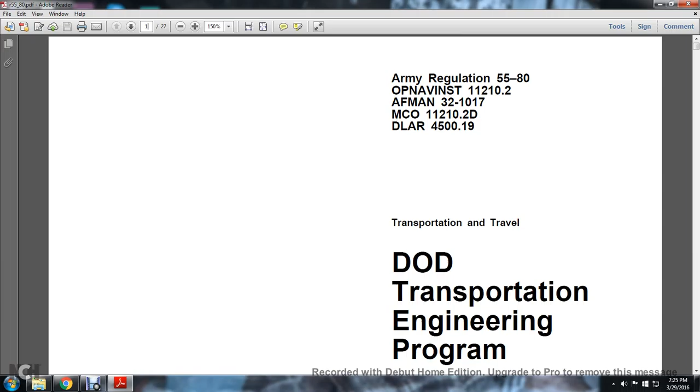Chapter 3, Department of Defense Transportation Engineering Program. Transportation and Travel Department of Defense Transportation Engineering Program.

Chapter 3, Highways for National Defense Program. The chapter provides the policy and procedure integrated with Department of Defense public highway needs for federal, state, and local transportation programs, normally conditioned with emergency situation procedures, services related to the Defense Highway System Program, the Defense Access Roads Program, the Department of Defense Traffic Engineering Program, and military use of public highways. There's also a collective constitution of the Highways for National Defense Program, the HND Program.

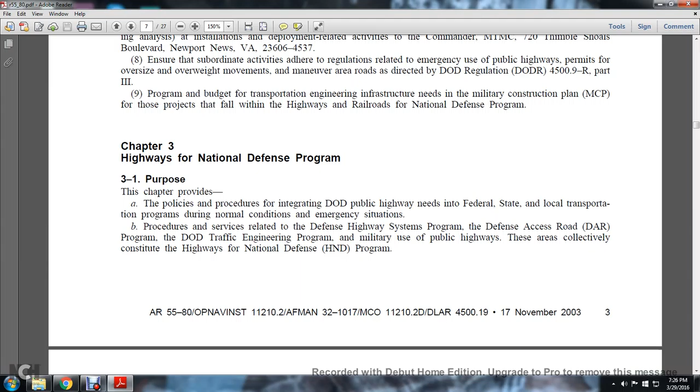3.2 Program applicability: this chapter applies to public highways open to general public travel in the United States, including non-restrictive roads for military installations.

Under these policies, installation activity commanders would identify peacetime and contingency off-installation public highway needs so that state and local highway authorities, as appropriate, can plan and budget projects and programs. State and local government authorities are expected to develop and maintain public highways accommodating normal continuing traffic generated by defense installation activities, the same as for other non-DOD traffic generated.

Military installation activities will not provide funds to maintain other off-installation public highways except for extraordinary circumstances as approved by the commander of the Military Traffic Management Command.

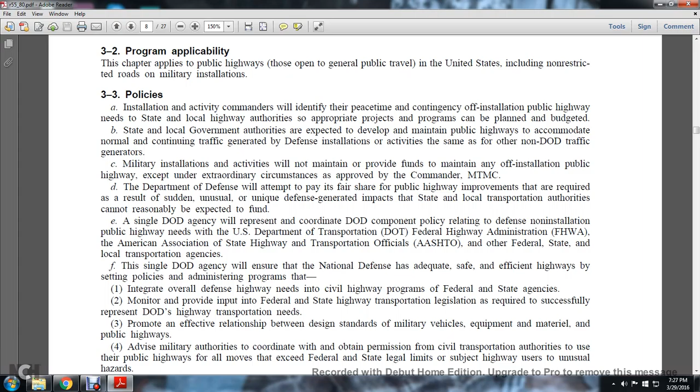The Department of Defense will attempt to pay its fair share of public highway improvements required as a result of sudden, unusual, unique defense-generated impacts that state and local transportation authorities cannot reasonably fund. A single Department of Defense agency will represent and coordinate with Department of Defense components the policy relating to defense non-installation public highway needs of the U.S.

Department of Transportation, Federal Highway Administration, the American Association of State Highway and Transportation Officials, and other federal, state, and local transportation agencies. The single Department of Defense agency ensures national defense has adequate, safe, and efficient highways by setting policy and administrative programs, integrating overall defense highway needs with the civil highway programs of federal, state, and local agencies, and monitoring and providing input into federal and state highway transportation legislation as required to successfully represent Department of Defense highway transportation needs, promoting an effective relationship between the design standards of military vehicle equipment and materiel and public highways.

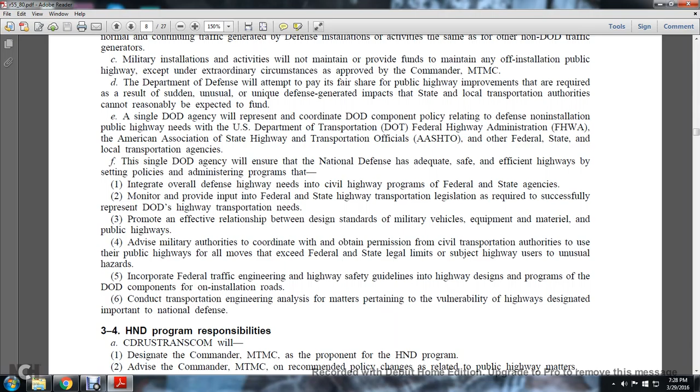It conducts transportation engineering analysis related to the vulnerability of highways designated as important to national defense. CDRUSTRANSCOM, designated along with the Commander, Military Traffic Management Command, as proponent of the Highway National Defense Program, advises the commander of Military Traffic Management Command, recommending policies related to public highway matters. The commander of Military Traffic Management Command will act as the Department of Defense focal point integrating defense public highway needs with civilian highway programs.

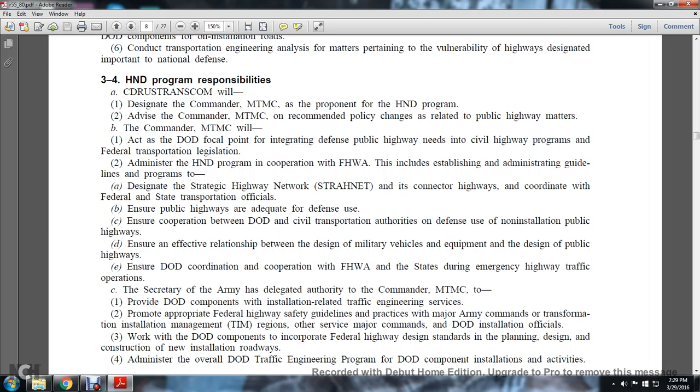Federal transportation legislation is administered through the Highway National Defense Program in cooperation with the Federal Highway Administration, including establishing and administering guidelines for the program designated for the Strategic Highway Network and connecting highways, coordinating with federal and state transportation offices to ensure public highways are adequate for defense, ensuring cooperation between the Department of Defense and civil transportation authorities on defense use of non-installation public highways, ensuring an effective relationship between the design of military vehicles, equipment, and public highways, and use of DOD coordination and cooperation with the Federal Highway Administration and the states during emergency highway traffic operations. The Secretary of the Army delegated authority to the commander of the Military Traffic Management Command.

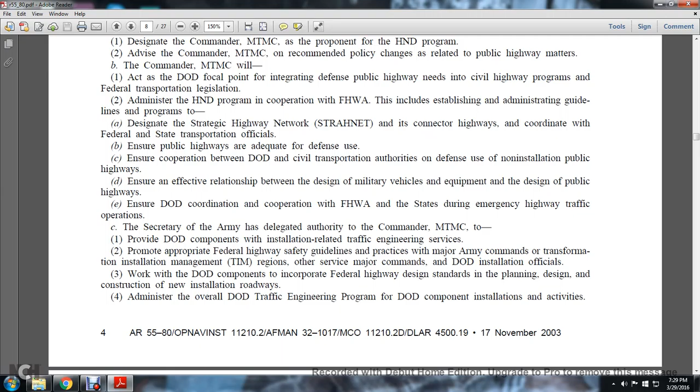This includes providing DOD components with installation-related traffic engineering services promptly and in accordance with federal and state highway guidelines and practices, for the Major Army Command, Transformation Installation Management Regions, other service major commands, and Department of Defense installation officials, working with Department of Defense components to incorporate Federal Highway Design standards in planning and design and construction of new installation roadways, administering the Department of Defense Traffic Engineering Program across Department of Defense components and installation activities.

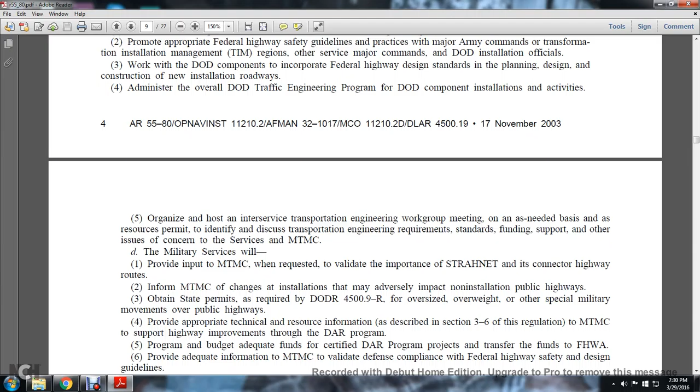Fifth, organize and host inter-service transportation engineering work group meetings on an as-needed basis, to identify and discuss transportation engineering requirements, standards, funding support, and other issues of concern to the Services and Military Traffic Management Command. Military services coordinate with the Military Traffic Management Command to validate the importance of STRAHNET connector highway routes, and inform the Military Traffic Management Command of changes at installations that adversely impact non-installation public highways.

Obtaining state permits is required by Department of Defense Regulation 4500.9R for oversized, overweight, and other special military movements on public highways, provided appropriate technical resource information is described in Section 3-6 of the regulation on Military Traffic Management Command highway improvements.

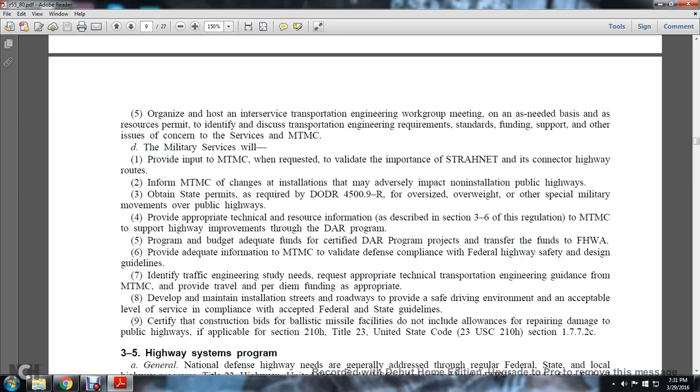For the DAR program, the program budget must be adequate for certified DAR program projects transferred to the Federal Highway Administration, and adequate information must be provided to Military Traffic Management Command to validate compliance with Federal Highway safety and design guidelines, and to define traffic and engineering study needs.

This includes appropriate technical transportation engineering guidance from Military Traffic Management Command, provided travel and per diem funding and permits as appropriate, to develop and maintain installation streets and roadways providing safe, environmentally acceptable levels of service in compliance with federal, state, and guidelines, certified with construction bids. Ballistic missile facilities do not include allowances to repair damage to public highways if applicable under Section 210H of Title 23, United States Code.

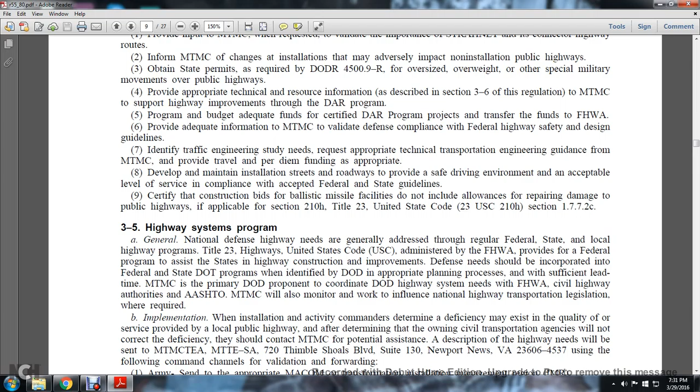3.5 Highway System Programs. Generally, National Defense Highway needs should address the regular federal, state, and local highway programs. Title 23 of the United States Code, administered with the Federal Highway Administration, provides federal programs to assist states with highway construction and improvements.

Defense needs should be incorporated into these federal, state, and DOT programs where identified with the Department of Defense and the appropriate planning process, with Military Traffic Management Command as the primary Department of Defense component to coordinate Department of Defense highway system needs.

The Federal Highway Administration, civil highway authorities and AASHTO. MTMC will monitor and influence national highway transportation legislation implementation. When installation commanders determine a deficiency may exist in the quality of service provided by local public or civil transportation agencies and determine it will not be corrected, they should contact the Military Traffic Management Command for potential assistance.

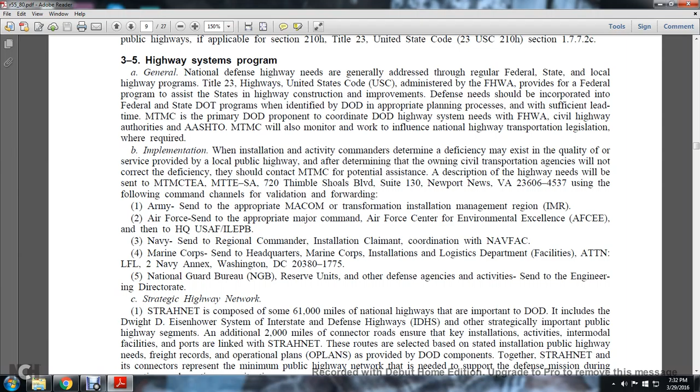Descriptions of highway needs should be sent to the Military Traffic Management Command, MTTE-SA, 720 Thimble Shoals Boulevard, Suite 130, Newport News, Virginia, VA 23606-4537, using the following command channels for validation and forwarding.

Army: sent to the appropriate MACOM, the Transformation Installation Management Region, IMR.

Air Force: sent to the appropriate major command, the Air Force Center for Environmental Excellence, and then to the headquarters of the U.S. Air Force. Navy: sent to the Regional Commander, Installation Coordination, the Navy Facilities Engineering Command, and to the headquarters Marine Corps Installation Logistics Department.

For National Guard Bureau, Reserve units, and other defense agency activities, send to the Engineering Directorate.

Strategic Highway Network. The Strategic Highway Network, or STRAHNET, is composed of 61,000 miles of national highways important to the Department of Defense. It includes the Dwight D. Eisenhower System of Interstate and Defense Highways.

Other strategically important public highway segments add an additional 2,000 miles of connector roads to ensure key installation activities and intermodal facilities are linked to the Strategic Highway Network.

Routes are selected based on installation public highway needs, freight records, and operational plans provided by the Department of Defense. Together, the Strategic Highway Network and connectors represent the minimum public highway network needed to support the defense mission in peacetime and contingency situations.

Continued validation of the Strategic Highway Network is important to the Department of Defense because it is formally identified as part of the National Highway System.

The National Highway System is designated by Congress to provide one of the major funding categories for allocation of federal aid highway funds to the states for the use of public highway designation, all to assist states in meeting Department of Defense public highway needs.

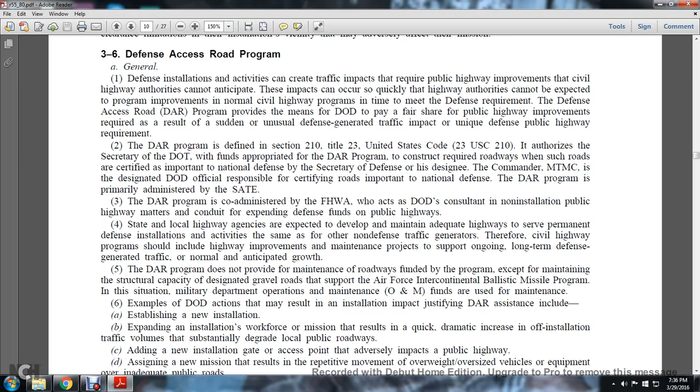The Access Road Program is primarily administered by SATE. The Defense Access Road Program is co-administered with the Federal Highway Administration, which acts as a DOD consultant in non-installation public highway matters, and conduit for expending defense funds on public highways.

State and local highway agencies are expected to develop and maintain adequate highways to serve permanent defense installation activities the same as non-defense traffic generated. Therefore, civilian highways should have improvements and projects that support long-term defense-generated traffic and normal anticipated growth. The DAR program does not provide for maintenance of roadways funded under the program.

An exception is made for maintaining the structural capacity of designated gravel roads supporting the Air Force Intercontinental Ballistic Missile Program. In such situations, military department Operation and Maintenance (O&M) funds are used for the maintenance.

Examples of Department of Defense actions that may result in an installation impact justifying a defense access road include establishing a new installation and expanding an installation's workforce or mission. This can result in a quick, dramatic increase in off-installation traffic volumes that substantially degrade local public roads, adding new installation gates or access points that adversely impact public highways, assigning a new mission resulting in repetitive movement of overweight and oversized vehicles and equipment, or inadequate public roads within the boundaries of an installation such that existing non-installation public highways may be closed.

Installation officials should ensure that off-installation highway impacts are considered when planning installation development, since Department of Defense resources can be required and significant impacts on other installations can result from program budgeting.

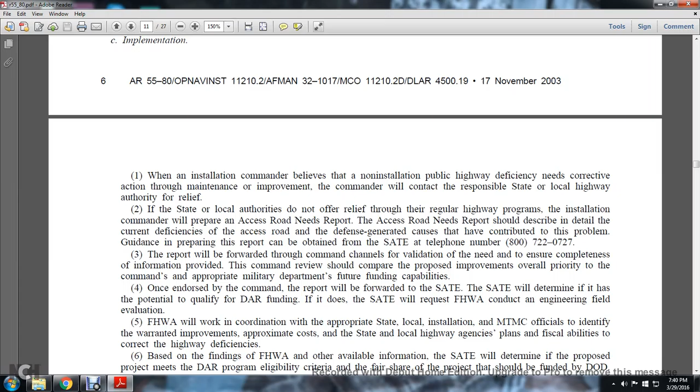The telephone number is 800-722-0727. The report is forwarded through command channels for validation, to ensure the accuracy of the information provided. The reviewing commander should compare the proposed improvements against overall priorities and the appropriate military department's funding capabilities.

Once endorsed by the command, the report will be forwarded to the SATE. The SATE will determine if it has potential to qualify for Department of Defense access road funding, and if it does, the SATE will request the Federal Highway Administration to conduct an engineering field evaluation.

The Federal Highway Administration will coordinate with the appropriate state and local officials, and military traffic management command officials, to identify warranted improvements, estimate the cost, and assess state and local highway agencies' ability to correct the highway deficiencies.

Based on the findings of the Federal Highway Administration and other available information, the SATE will determine whether the proposed project meets the Department of Defense Access Road Program eligibility criteria, and the fair share of the project that should be funded by the Department of Defense.

Once the final project scope and the amount of defense funding contribution are agreed upon by the appropriate civil authorities and the SATE, the command or the Military Traffic Management Command, in accordance with Title 23 U.S. Code 210, will certify that the road section is important for national defense.

This certification is a requirement before any Department of Defense funds are provided to public highway authorities. The Department of Defense may not provide funds to public highway authorities for non-installation highway improvements through any other means except by direction of Congress.

Department of Defense access road funds are normally identified as a specific line item in the annual military construction programs of the appropriate military department, in accordance with the military department's procedures for programming, budgeting, and financing.

Defense Access Road projects for their respective installation activities, appropriated through the Defense Access Road Program, will have their funds transferred to the Federal Highway Administration at the direction of the MTMC.

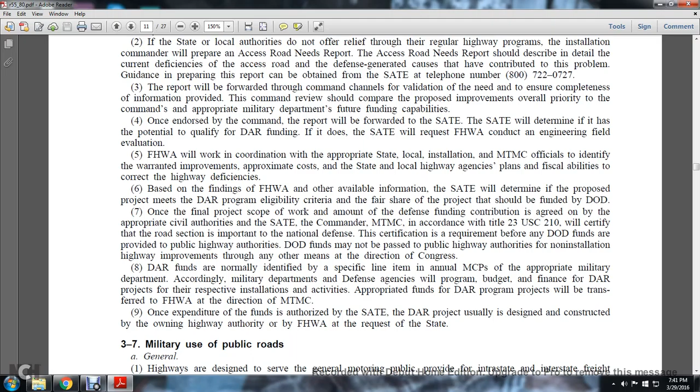Once the expenditure of funds is authorized by the SATE, the DAR project is usually designed and constructed by the owning highway authority or by the Federal Highway Administration, at the request of the state.

3.7 Military Use of Public Roads. General highways are designed as a general motoring public system providing interstate and intrastate freight movement that meets the needs of the Department of Defense in peacetime, operating within federal and state highway legal limits and safety regulations, to help ensure the highway's adequate availability if required for a national emergency.

Therefore, Department of Defense policy requires that movement of extremely oversized or overweight vehicles and cargo use alternate modes such as rail, barge, or other commercial highway carriers whenever possible.

If no feasible alternative exists, the Department of Defense must obtain permits from the owning highway authority. The authority for movement of oversized, overweight equipment on public roads is required just as it is for non-Department of Defense highway users.

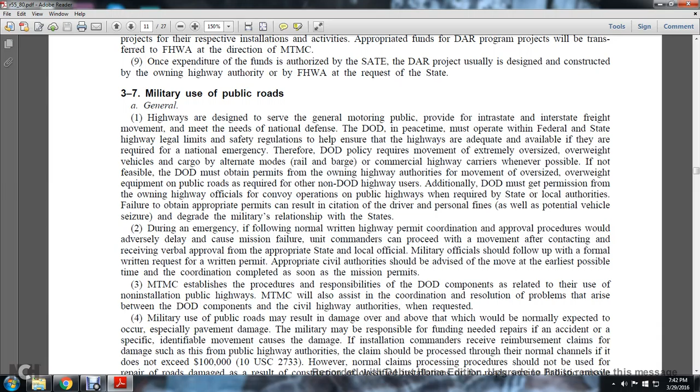Additionally, Department of Defense units must get permission from the owning highway officials for convoy operations on public highways when required. Failure to obtain appropriate permits from state and local authorities can result in citation of the driver, personal fines, potential vehicle seizure, and can degrade military relationships within the states.

During an emergency, following the normal written highway permit coordination and approval procedures may adversely delay the mission, causing mission failure. Unit commanders can proceed with a movement after contacting and receiving verbal approval from the appropriate state, local, and military officials, and should follow up with a formal written request for a written permit. The appropriate civil authorities should be advised of the move at the earliest possible time, with coordination completed as soon as the mission permits.

The Military Traffic Management Command establishes procedures and responsibility for Department of Defense components as related to the use of non-installation public highways.

The Military Traffic Management Command will also assist in coordinating resolution of problems that arise between the Department of Defense and civil highway authorities when requested. Military use of public roads may result in damage beyond what would normally be expected, especially pavement damage.

The military may be responsible for funding repairs for damage caused by an accident or a specific and identifiable movement. If an installation commander receives a reimbursement claim for such damage from public highway authorities, the claim should be processed through normal channels if it does not exceed $100,000.

However, normal claims processing procedures should not be used for repair of road damage resulting from construction of classified installations, or roads serving ballistic missile facilities, or for claims exceeding $100,000. These should be referred to the Military Traffic Management Command for resolution.

Oversized, overweight movement and convoys. Defense Transportation Regulations, Department of Defense 4500.9R, Part 3, Appendix 5, permits oversized, overweight, and other special military movement on public highways in the United States and provides specific guidance. Requests for special hauling permits require the Department of Defense representative authorized to determine whether highway movements are essential to the national defense, both commercial and organic transportation movements.

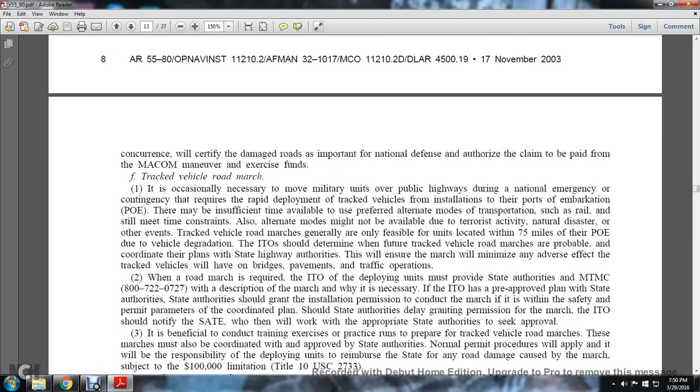Track vehicle road march: it is occasionally necessary to move military units on public highways during a national emergency or contingency that requires rapid deployment of track vehicles from the installation to the port of embarkation. There may be insufficient time available to use preferred alternative modes of transportation such as rail to meet the constraints, and alternative modes might not be available due to terrorist attack, natural disaster, or other events.

Track vehicle road marches are generally only feasible for units located within 75 miles of the port of embarkation. Due to vehicle degradation, the ITOs should determine when future tracked vehicle road marches are probable and coordinate their plans with the state highway authorities.

This will ensure that the march minimizes any adverse effects that tracked vehicles will have on bridges, pavements, and traffic operations.

When a road march is required, the ITO of the deploying units must provide the state authorities and the Military Traffic Management Command at 800-722-0727, along with the description of the march and why it is necessary.

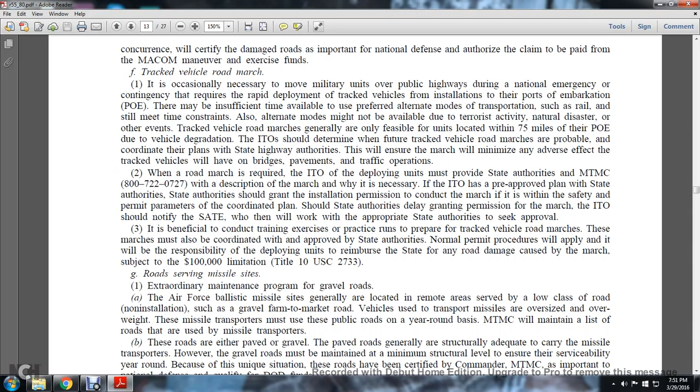If the ITO has a pre-approved plan with the state authorities, it should grant the installation permission to conduct the march, provided it is within the parameters of the coordinated plan and safety permits. Should the state authorities delay granting permission for the march, the ITO should notify SATE, who will then work with the appropriate state authorities to seek approval.

It is beneficial to conduct training exercises as practice runs to prepare for track vehicle road marches. These marches must also be coordinated with the appropriate state authorities.

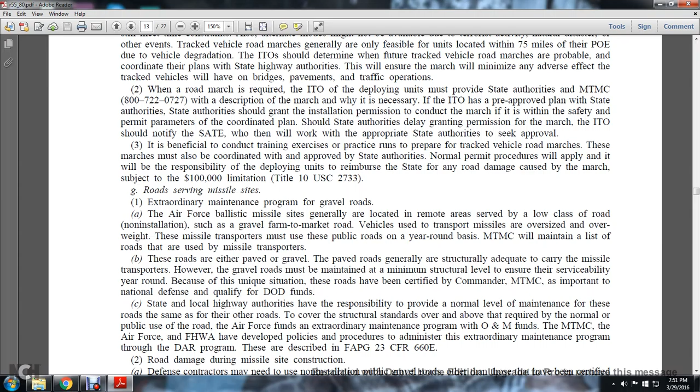Normal permit procedures will apply, and the deploying units will be responsible for reimbursing the state for any road damage caused by the march, subject to a $100,000 limitation under Title 10 U.S. Code 2733.

Roads serving missile sites: extraordinary maintenance program for gravel roads. Air Force ballistic missile sites generally are located in remote areas served by a low class of non-installation roads, such as gravel farm-to-market roads.

Vehicles used to transport missiles are oversized, and the missile transporters must use the public roads on a year-round basis. The Military Traffic Management Command will maintain a list of the roads used for missile transporters. These roads are either paved or gravel.

Paved roads generally are structurally adequate to carry the missile transporters. However, the gravel roads must be maintained at a minimum structural level to ensure serviceability year-round.

Because of this unique situation, the roads have been certified by the Commander of the Military Traffic Management Command as important for national defense, qualifying for DOD funds.

State and local highway authorities have the responsibility to provide a normal level of maintenance for these roads, the same as for their other roads, to cover the structural standards above that required for normal public use of the roads. The Air Force funds the extraordinary maintenance program.

with O & M funds. The Military Traffic Management Command, the Air Force, and the Federal Highway Administration has developed policy and procedures to administer the extraordinary maintenance program through the Department of Defense Access Road Program, as described in the FAPG 23 CFR 660E.

Road damage during missile site construction: defense contractors may need to use non-installation public gravel roads, other than those certified as important for national defense, during construction of missile facilities, because some of these roads were not designed to support the type of traffic from construction vehicles and may be damaged.

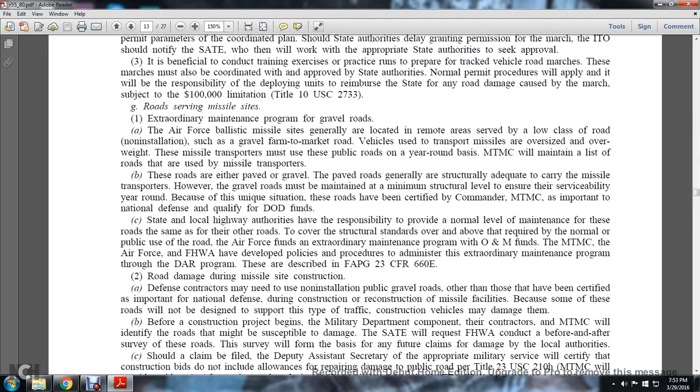Before the construction project begins, the military department component, their contractors, and the Military Traffic Management Command identifies the roads that might be susceptible to damage. The SATE will request the Federal Highway Administration conduct before and after surveys of these roads. These surveys will form the basis of any future claims of damage by local authorities.

Should the claim be filed, the Deputy Assistant Secretary of the appropriate military service will certify that construction bids do not include allowances for repairing damage to public roads, per Title 23 U.S. Code 210H. Military Traffic Management Command will provide guidance after review and analysis of relevant information. The SATE will determine the recommendation on certification for the Military Traffic Management Command.

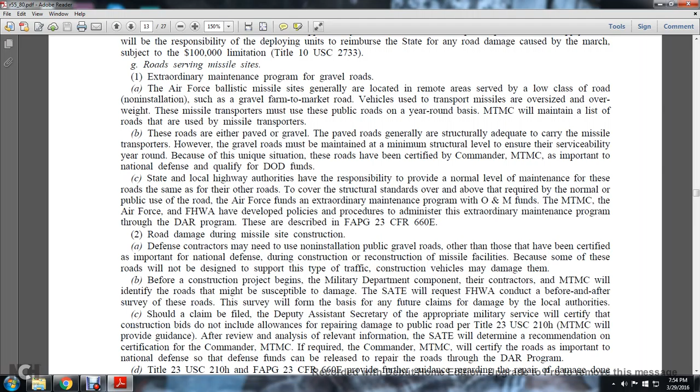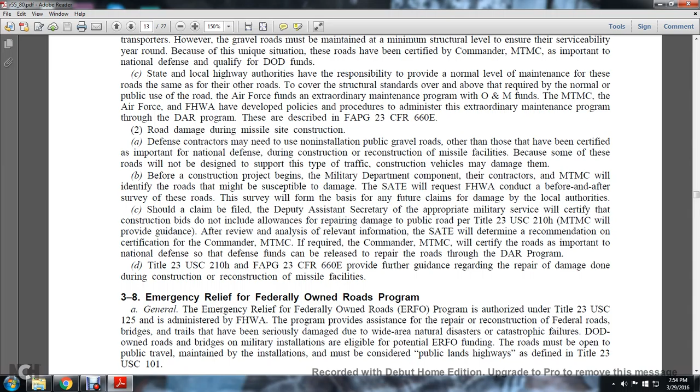If required, the Military Traffic Management Command will certify the roads as important to national defense so that defense funds can be released for repair of the roads through the DAR Program. Title 23 U.S. Code 210h and FAPG, 23 CFR 660E, provides further guidance regarding repair of damage done during construction or reconstruction of missile facilities.

Section 3.8, Emergency Relief for Federally Owned Road Programs. The Emergency Relief for Federally Owned Roads program is authorized under Title 23 U.S. Code 125 and administered by the Federal Highway Administration. The program provides assistance for repair or reconstruction of federal roads, bridges, and trails that have been seriously damaged due to wide-area natural disasters or catastrophic failures, and Department of Defense-owned roads, bridges, and on military installations that are eligible for potential ERFO funding.

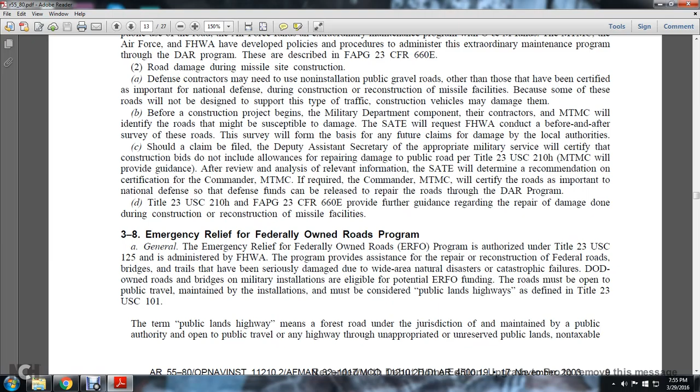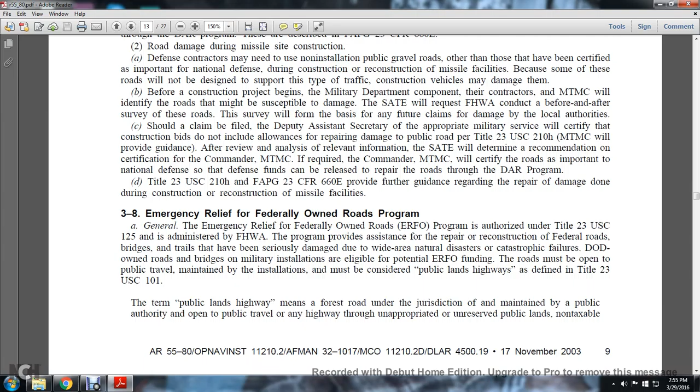Funding of roads open to public travel and maintained by the installation must be considered public land highways, as defined in Title 23 U.S. Code 101. The term public land highways means forest roads under the jurisdiction of, and maintained by, public authority, open to public traffic, and any highway through unappropriated, unreserved public lands, non-taxable Indian lands, or other federal reservations under the jurisdiction of and maintained by public authority and open to public travel.

Implementation: an installation official who believes road damage has occurred due to a natural disaster or catastrophic failure may contact the Military Traffic Management Command and begin the process of determining eligibility. This should be done within two weeks following the disaster or failure.

The installation will need to provide the date and time, description of the event, and description of the damage to the road. Based on this information, the SATE will prepare the initial Department of Defense notification to the Federal Highway Administration.

Installation officials should immediately document the roadway damage with photographs and detailed descriptions, and cost estimates, and should begin emergency repairs to restore essential traffic service and prevent further damage to the federally owned facilities.

If properly documented, the costs may later be reimbursed. The Federal Lands Highway Division engineer, the FLHD, makes a formal finding on whether the disaster qualifies for funding under the ERFO program.

Installation officials and the Federal Lands Highway Division engineer will prepare a disaster assessment and field report. The Federal Lands Highway Division engineer will make the finding on whether the documented natural disaster or catastrophic failure has occurred and establish eligibility for ERFO funding.

If the finding is positive and funding eligibility is issued, a detailed on-site inspection will be conducted with the support of the installation official.

The installation will submit an application to the Military Traffic Management Command for transmittal to the Federal Lands Highway Division engineer. The Federal Lands Highway Division engineer will approve the appropriate project for the Federal Lands Highway Division. The administrator will allocate obligation authority to the SATE.

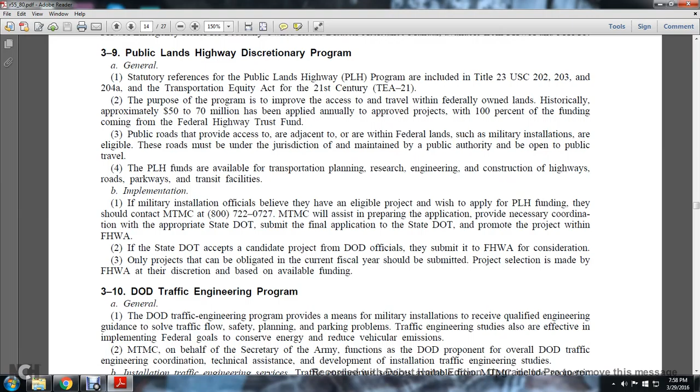If the state Department of Transportation accepts the candidate project from the Department of Defense, they submit it to the Federal Highway Administration, and for consideration only projects that can be obligated within the current fiscal year should be submitted.

3-10: Department of Defense Traffic Engineering Program.

The Department of Defense Traffic Engineering Program provides a means for military installations to receive qualified engineering guidance to solve traffic flow, safety planning, and parking problems. The traffic engineering studies are also effective in implementing federal goals to conserve energy and reduce vehicle emissions.

Installation traffic engineering services available from the Military Traffic Management Command include geometric design of transportation facilities, analysis of traffic operation safety concerns, analysis of roadway facilities, and analysis and assignment of specific gate entry control facilities to support installation anti-terrorism project selection.

Placement and operation of traffic control devices, guidance in support of installation master comprehensive planning, and regional shore installation planning.

Each study involves a review of the installation master development and comprehensive plan, collection of data, review of accident and congestion problems, location analysis, roadway enhancement alternatives, and development of recommended engineering improvements.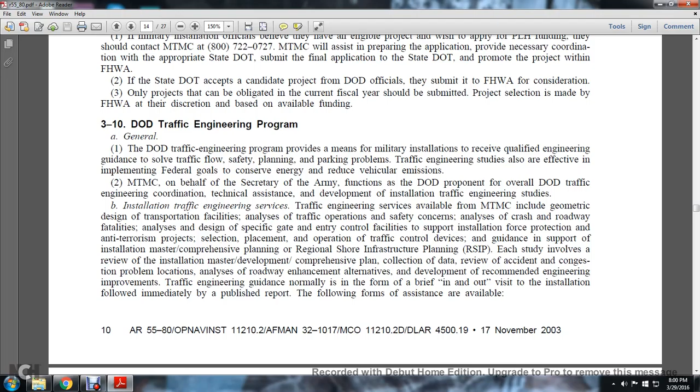Telephone advice: assistance from Military Traffic Management Command transportation engineers is available at 800-722-0727 to help resolve problems.

Limited in scope, they answer specific questions related to the proper application of traffic control devices, design criteria, and similar topics, and review plans, concepts, and proposals.

These services are available to validate the preliminary design for new transportation traffic-generating facilities prior to the actual site selection or design approval.

Reconnaissance studies address problems limited in scope, usually accomplished by an engineer being on site for 2 to 4 days.

Intermediate study: the intermediate study addresses several problems of limited to average scope, usually accomplished by an engineer being on site for 4 to 7 days.

Comprehensive study: this normally analyzes the entire installation transportation network and addresses numerous operational and planning issues. Because of the time and resources required to conduct them, they are usually outsourced to contract firms at installation expense.

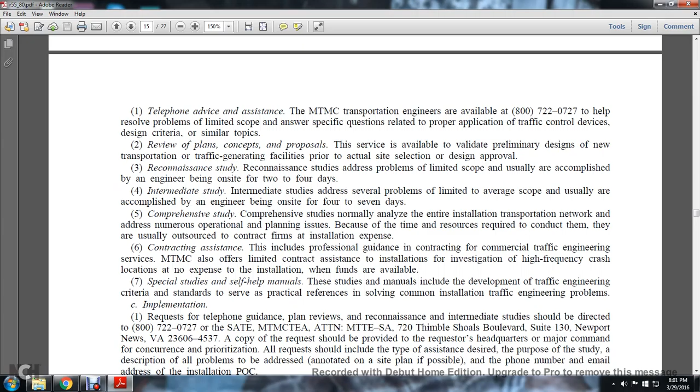Contracting assistance includes professional guidance for contracting commercial traffic engineering services. The Military Traffic Management Command also offers limited contract assistance to installations for the investigation of high-frequency crash locations, at no expense to the installation when funds are available.

Special studies and self-help manuals: these studies and manuals include the development of traffic engineering criteria and standards that serve as a practical reference in solving common installation traffic engineering problems and implementations.

Requests for telephone guidance, plan reviews, or reconnaissance and intermediate studies should be directed to 800-722-0727 or SATE, MTMCTEA, 720 Thimble Shoals Boulevard, Suite 130, Newport News, Virginia 23606-4537.

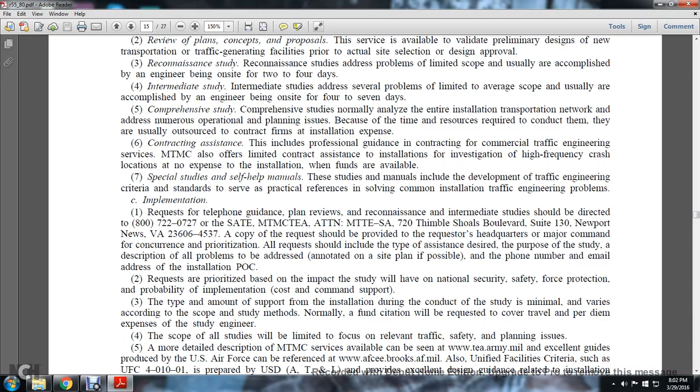A copy of all requests should be provided to the requester's headquarters major command for concurrence and prioritization. All requests should include the type of assistance desired for the purpose of the study, a description of all problems to be addressed, a site plan if possible, and the phone number and email address of the installation point of contact.

Requests are prioritized based on the impact the study will have on national security, safety, force protection, probability of implementation, cost, and command support.

The amount of support from the installation during the conduct of the study is minimal and varies in accordance with the scope of the study. Normally, the fund citation will be requested to cover the travel and per diem expenses of the study engineer. The scope of all studies is limited to the focus of the relevant traffic safety and planning issues.

A more detailed description of the Military Traffic Management Command services available can be seen at tea.army.mil. Excellent guides produced by the U.S. Air Force can be referenced at AFCEE, Brooks Air Force Base.

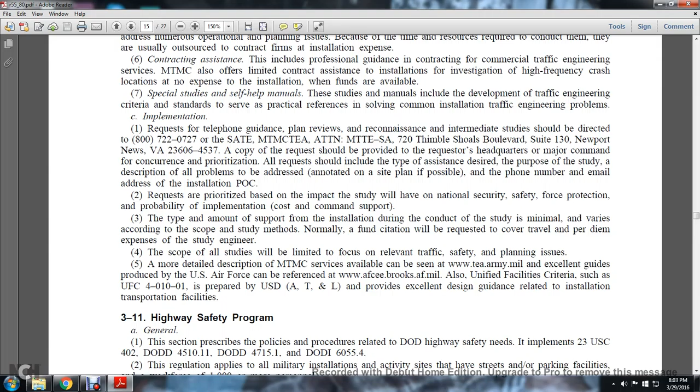Also, unified facility criteria such as UFC 4-010-01, prepared by the United States Under Secretary of Defense for Acquisition, Technology and Logistics, provide excellent design guidance related to the installation of transportation facilities.

I'm just wondering. All right, we're going to read on Chapter 4, and then I'm going to take a break.

Chapter 3-11, Highway Safety Program. This section describes the policy and procedures related to Department of Defense highway safety needs and implementation, referencing 23 U.S. Code 402, Department of Defense 4510.11, and Department of Defense 4715.1.

Department of Defense 6055.4. This regulation applies to military installation activity sites with streets, parking facilities, and a workforce of 1,000 or more personnel. Policy: installation commanders will develop and maintain roads to national accepted standards that provide a safe driving environment for all drivers and passengers.

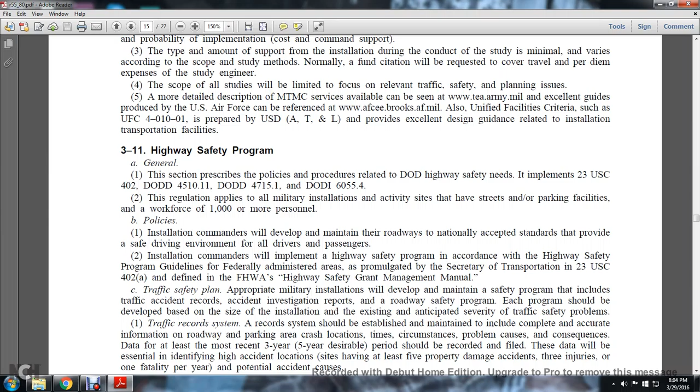Installation commanders will implement a highway safety program in accordance with the Highway Safety Program guidelines as promulgated by the Secretary of Transportation under 23 U.S. Code 402, defined in the Federal Highway Administration Highway Safety Grant Management Manual.

The traffic record system should be established and maintained to include complete and accurate information on roadway and parking area crashes - location, time, circumstances, problem causes, and consequences. Data for at least the most recent 3 to 5 years, a desirable period, should be recorded and filed.

These data will be essential in identifying high accident location sites, defined as having at least 5 property damage accidents, 3 injuries, or 1 fatality per year.

Regarding potential accident causes, the accident investigation program: investigation of traffic accidents should identify applicable violations and record and information on all human, vehicular, and roadway factors possibly contributing to the accident.

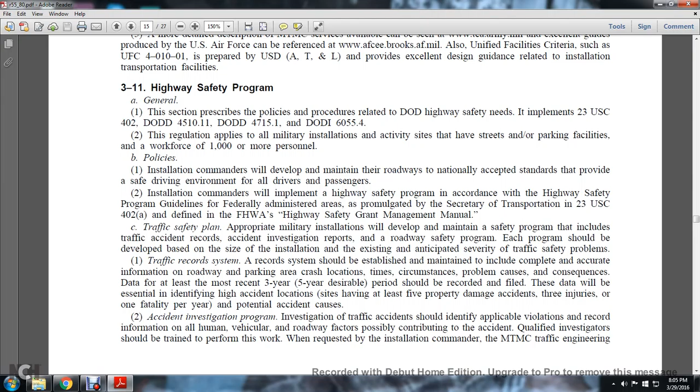Qualified investigators should be trained to perform this work when requested by the installation commander, the Military Traffic Management Command traffic engineering staff.

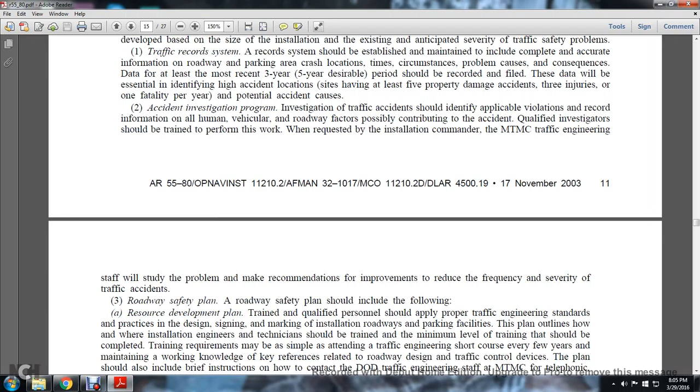Engineering staff will study the problem and make recommendations for improvements to reduce the frequency and severity of traffic accidents. This leads into the roadway safety plan.

A roadway safety plan shall include the following resource development plans: trained and qualified personnel should apply proper traffic engineering standards and practices to the design, signing, and marking of installation roadways and parking facilities. This plan outlines how installation engineers and technicians should be trained.

The minimum level of training that should be completed may include training requirements such as attending the traffic engineering short course every few years to maintain working knowledge.

Key references relate to roadway design and traffic control devices. The plan should also include brief instructions on how to contact the Department of Defense traffic engineering staff, such as the Military Traffic Management Command, for telephonic, electronic, or on-site guidance on implementation plans.

The purpose of this is to organize installation efforts to identify and analyze potential hazard locations, schedule and execute corrective actions, and follow up to evaluate the effectiveness of the changes.

Each installation should prioritize improvement projects based on their anticipated traffic safety benefits. Larger, more complex installations require more than one plan to address numerous traffic issues.

Traffic control devices: the plan provides for periodic review of existing traffic control devices and systematic replacement of substandard or deteriorated devices. All installation traffic signals, signs, and pavement markings will substantially conform with the Federal Highway Administration Manual on Uniform Traffic Control Devices for streets and highways.

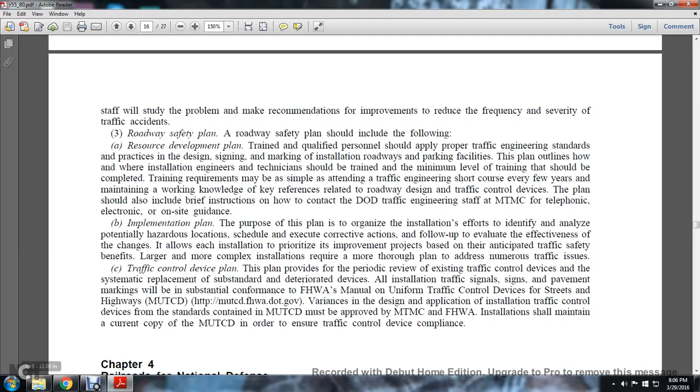The MUTCD can be referenced at mutcd.fhwa.dot.gov. Variances in the design or application of installation traffic control devices from the standards contained in the MUTCD must be approved by the Military Traffic Management Command with the Federal Highway Administration. Installations shall maintain a current copy of the MUTCD to ensure traffic control device compliance.

Chapter 4, Railroads for National Defense.